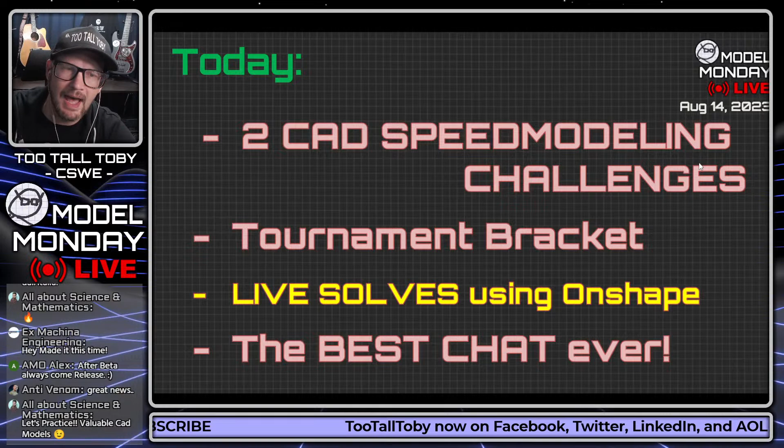So today we're going to do two speed modeling challenges. We're going to talk about the tournament bracket. We're going to do some live solves from this weekend using Onshape. And of course, we're going to interact with the best chat ever. Very excited to be in here with all of you.

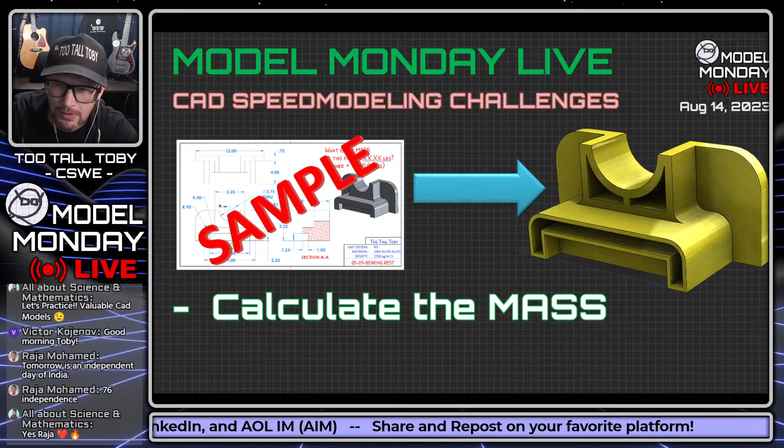And with that, let's get into our 3D CAD speed modeling challenges for today, Monday, August 14th. I'm going to show you guys a 2D print. You in the chat are going to be challenged to turn that into a 3D CAD model and calculate the mass. You can do this using any 3D CAD system, anything that you're using. If you're using FreeCAD, if you're using build123d, whatever you're using, it doesn't matter. All CAD are welcome here. So you're going to take this 2D print and turn it into a 3D model.

Raja Mohamed said, yes, actually, I only have one small laptop, so I don't have any choice. I was wondering if that's what was going on with that image. Yeah.

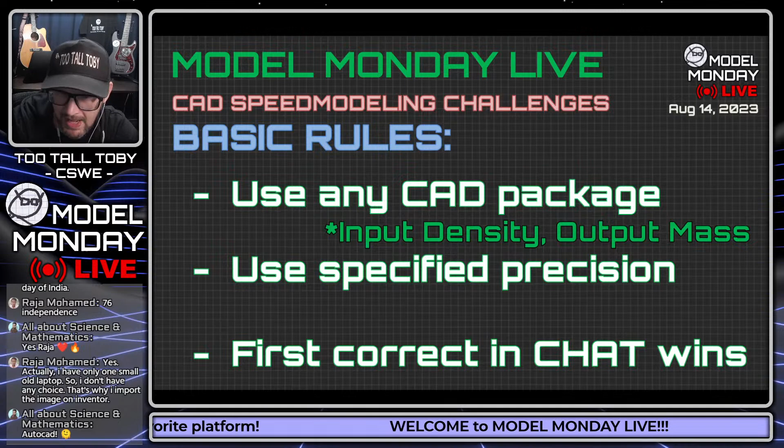And the advanced rules are this is meant to be fun and good-spirited. I will make mistakes from time to time, and the Ivan exploit is permitted. So if you find an opportunity to use it, feel free. But if you want to truly flex and do it the right way, that's even more impressive.

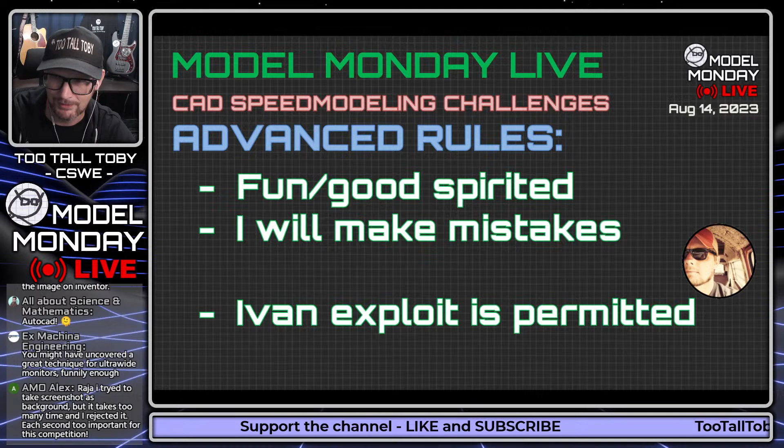All right, guys, here we go. Let's flip over to full screen. I'm going to show you this first challenge here. As soon as I show you the challenge, you're going to take a 2D screen capture and begin modeling this in your 3D CAD package of choice. So here we go, in 3, 2, 1, go.

So this is the cheap tool. I'm sure we've all received products that have cheap tools like this in them. I know I certainly have. And you kind of just throw it away and go get your actual toolkit, that way you can get the job done right.

But today, your job is to turn this cheap tool model, or drawing, into a 3D CAD model and to calculate the mass.

I'm going to take a sip of my tasty beverage today. Today I'm drinking unsweetened Pure Leaf black tea. So unsweetened tea is the drink of the day today.

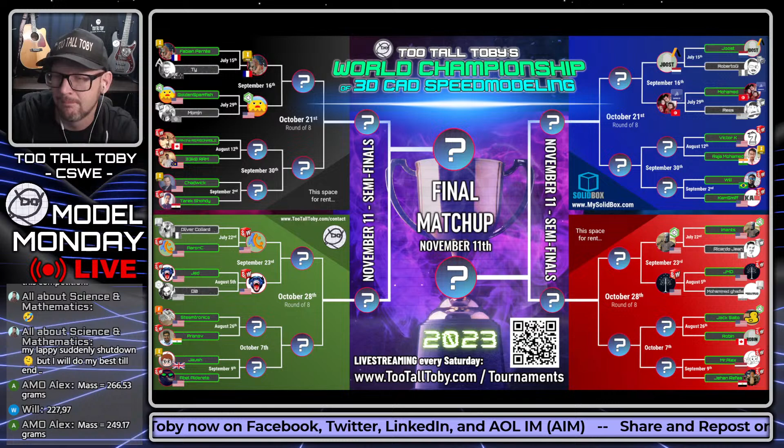Just hit me up at TooTallToby.com/contact, or AOL Instant Messenger, as you can see at the bottom of the screen. Still rocking the AIM for those of you who still have your old Windows XP computers, or your Windows 3.1 computers with your AOL IM installed, Windows 98 plus.

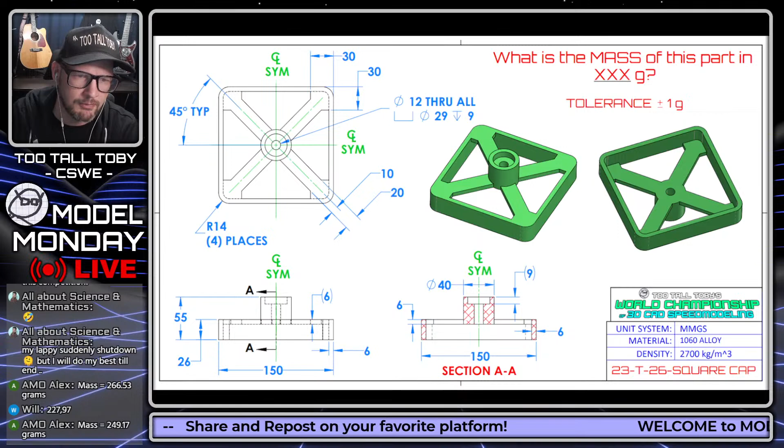Our third model here, Victor K and Raja Mohamed did this one, and they both were cruising through this model. It does have a little bit of tricky geometry with regards to the way that face is sticking out, so we'll take a look at how we could approach that.

And then this final model here, I think this one was pretty straightforward - a quick revolve, a couple of cuts, and some counter bores, and you're good to go on this last one. So let's start out with this first one here.

When it comes to a model like this, the main thing you always want to think about when turning a 2D print into a 3D model is your game plan for this challenge. What's my starting plane going to be? What's my starting profile going to be? I think in a model like this, you want to note that the model is symmetric, so we have symmetry here.

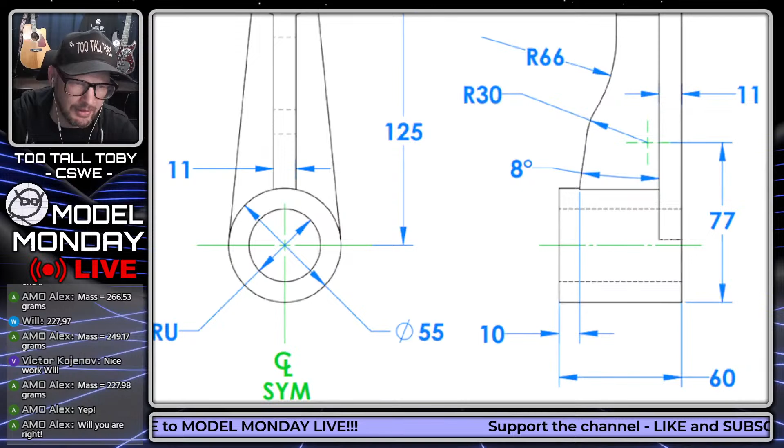We also have this 125 dimension coming from this circle here and going up to this upper circle. So it probably makes sense, it's probably just intuitive, to draw this thing from the top down and draw what we'd call the footprint of the model in 3D CAD.

So meaning you'd probably start out by drawing a shape like this. Now how much of that shape you want to include in that original sketch really depends on how comfortable you are with 3D CAD, with 3D sketching, and with contour selection and reusing those contours for subsequent features.

Because most of the time it's good to save your cut extrudes for later and create your solid geometry first. So what I would probably do is create this kind of footprint area here, this extrusion that goes up to 11 millimeters. Then I'd create this boss here that goes up to 60 millimeters.

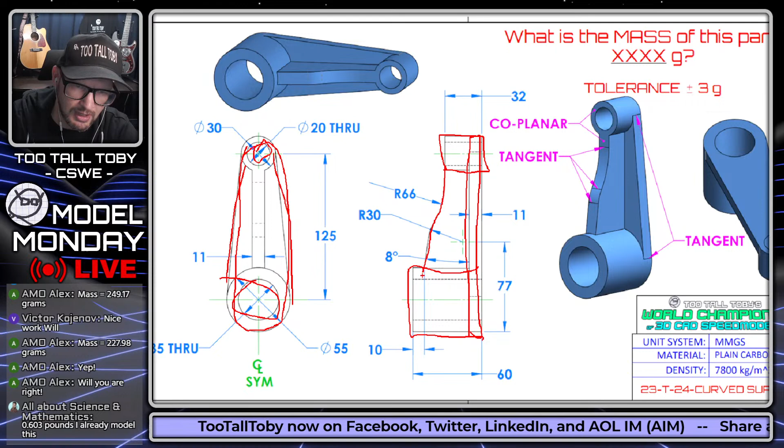I would create this boss here that goes up to 32 millimeters. I would create the rib, this kind of centered area, and then I would finish off by going back in and adding those cut extrudes.

So let's see what we can come up with this model. Just like what you guys are doing, I'm going to start out by grabbing a screen capture of this print. I'm going to move this screen capture over onto my second monitor, and then I'm going to attempt to create this model using Onshape.

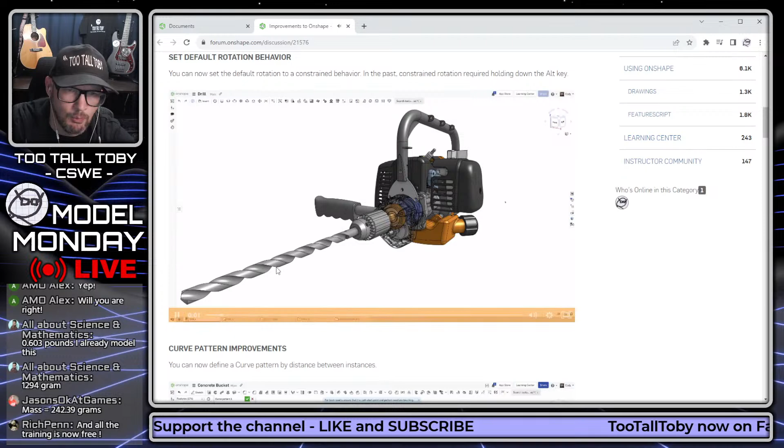They have videos that help you understand what those improvements are. So you can see here's a video with audio, using the right mouse button to rotate. Kind of just a quick little update here, giving us some new, different controls over how the rotate command is going to work when you're right mouse buttoning or middle mouse buttoning dragging in Onshape.

You can see there's an update here on how curve pattern works, and then a quick video, short, 14 seconds, 16 seconds here. It just really helps you to go through and see what has changed and how it has changed, and how you can start implementing that into your workflow right away. It's nice that these come out so frequently, and it's really nice that they explain right away what to expect.

Toby, I'm facing a problem with the cover model 6 days ago.

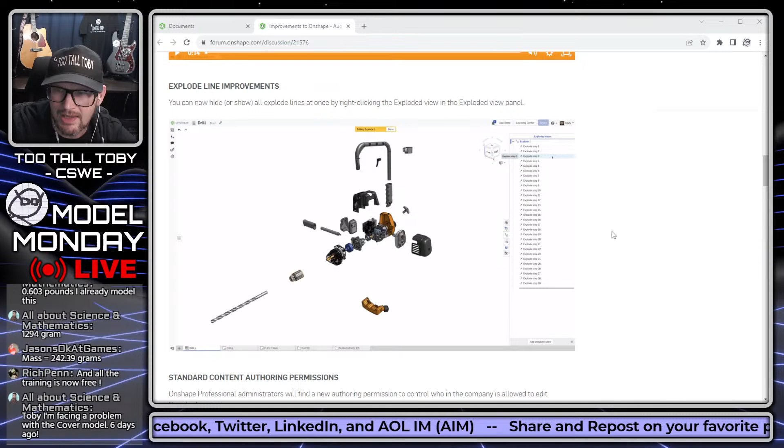All right, maybe we should take a look at that one today too. Let's see what happens with that one, all about science and mathematics. Let me see what I can do for you.

And all the training is now free. Yeah, the training in Onshape is incredible. It's up here at the top.

When you're logged in here in documents, you can go to what's called the Learning Center up at the top, and it's basically like college level degree courses, all laid out for you, start to finish - starting from somebody who has never heard of CAD before, explaining what CAD is, explaining the history of CAD, and then going all the way through into things that are really deep and specific to Onshape.

So the Learning Center has a ton of training in there that you can access for free. Again, if you're looking to learn CAD, or if you know somebody, a youngster in your family who's thinking about learning CAD and 3D printing, this could be a great way to turn them onto CAD for free and without having to install anything. It just works right in your browser.

So very happy with my Onshape experience so far.

Yeesh, next time, note to self, change units first instead of typing MM after everything. Yes, that is a good pro tip there, Jason. That is a very good pro tip. I've done that before too. It's kind of nice that Onshape will handle that in the beginning.

I actually made a video tutorial, I think like last week or the week before, about how I started out in inches or millimeters by accident, and I typed IN for the first sketch, and then I went up and changed the units after the first sketch. So yeah, it's nice that some of these different CAD packages can handle the different types of units that are out there.

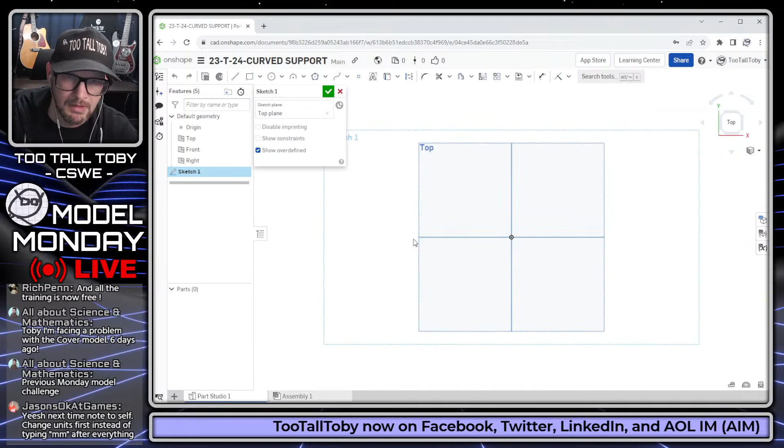I'm going to pick the top plane, press the S key, and begin the sketch command here on that top plane. Get normal, press the S key again, and now I'm going to jump into the line, arc, line workflow. So I'm just creating a line, creating an arc, creating another line.

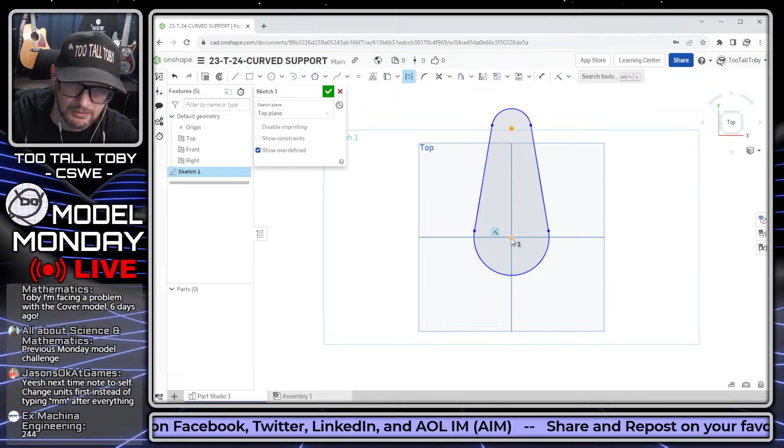Here I'm going to select these two entities and press T to make them tangent. I'm going to select these two entities and press I to make them coincident. And I'm going to select these two entities and press V to make them vertical. And now I'm ready to jump into the Smart Dimension command.

You can see here that even though this is running in a browser, it's just instant, snappy. That was one of the big things I was worried about when I was beginning to learn Onshape.

This should be 30 over 2. This should be 55 over 2. These are shown as diameters, but I am defining the radius. And then this is going to be the 125.

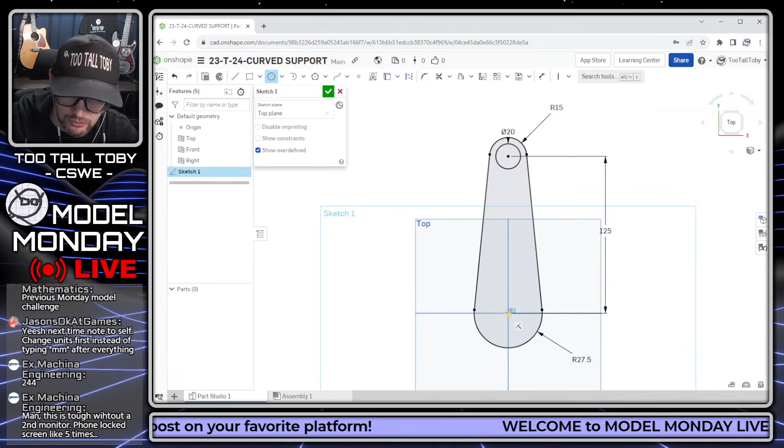One of the things I was concerned about starting to use a program that exists entirely in a browser was that the geometry was going to be slow or sluggish to create. And I've been pleasantly surprised that that is not the case. It just kind of instantly drops, instantly extrudes, instantly creates, and I haven't run into really any lagging. So super happy with that as well.

And there we go, there's my first sketch. I'm going to now take that and extrude it. I'm not going to extrude the whole thing. Instead, what I'm going to do is extrude this outer perimeter, but not these inside bosses yet. So I'm going to fill them in and bring that up to a height of 11.

And then I'm going to go back to that underside shape there. Select face, begin a sketch, and create another circle here. This time the circle is going to just go right up to this point here. S key, extrude, and that's going to go up to a height of 60. So that's 60 from the bottom.

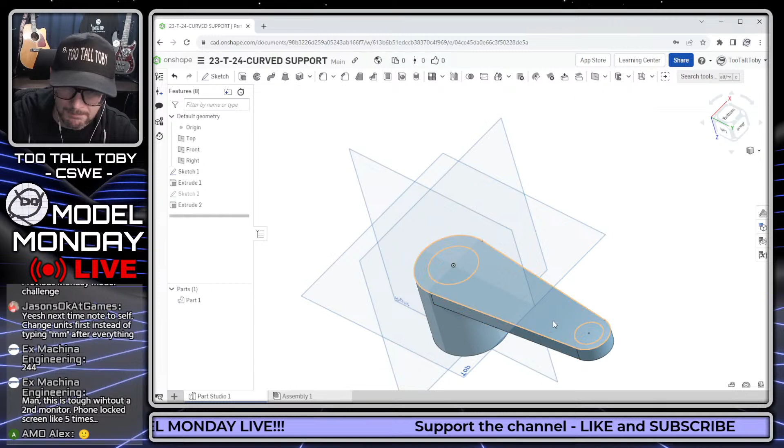Again, I'm going to go to this underside here, S key, begin a sketch, jump into my circle command, click on this other point here that I created in my initial sketch or layout sketch, and that is going to go up to a height of 32. A lot of times I like to use the tab key to get through there. I just tab through, get to the height, and then enter.

And now I can take this original geometry and turn that into a remove, which is like a cut extrude. And I can remove this geometry here. So let's reverse the direction and make that go through all to remove those holes.

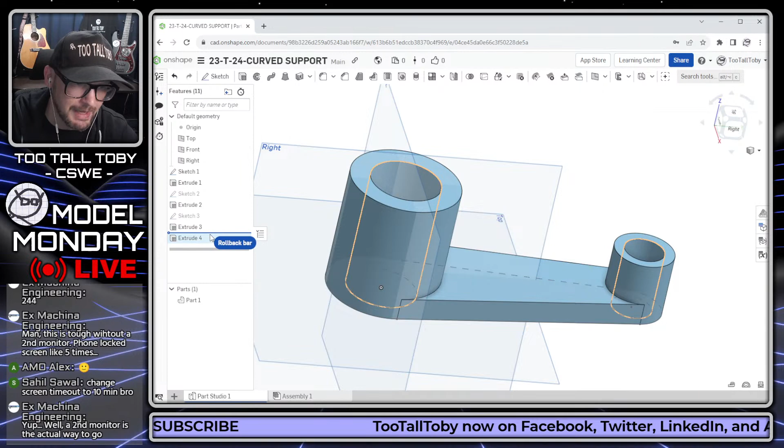And there we go, we got those holes, but whoops, I forgot to put the rib in. I wanted to put the rib in first. So we've got what's called a rollback bar here. We can roll that back to before those cut extrudes, and then I can add those cut extrudes in just a little bit later. So now I'm going to create the sketch for that rib.

And this rib is kind of tricky. It starts out coming down at an angle of 8 degrees. Then it goes into a radius here at 30 millimeters, and then it transitions in, oh sorry, it goes this way. Then it transitions into another radius here at 66 millimeters, and then it comes across with a tangent line, and then this line is going to be horizontal.

And this line here is supposed to hook onto this top edge of the model. So those two are supposed to be coincident or collinear. So there we go, that kind of gives me that location. Maybe I'll have this just kind of hanging out in space here.

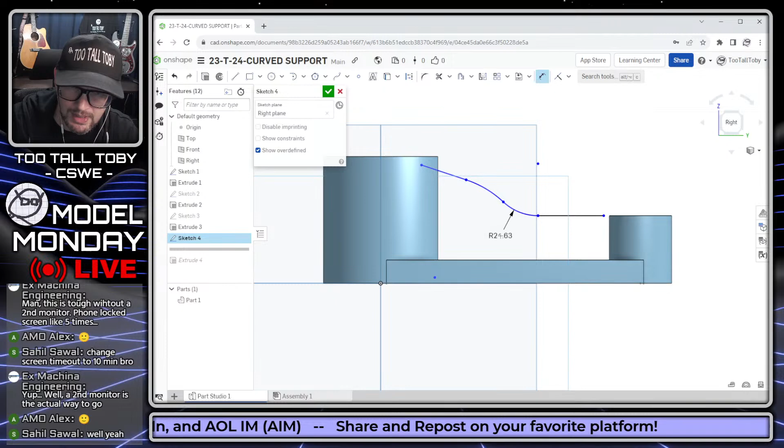And then we've got, like I said, a radius here at 66, a radius here at, this is at 30, and an angle here at 8 degrees. So yeah, I mean, you can see this sketch, I kind of did this on purpose. I wanted to make something that would be at least a little bit tricky.

I didn't want it to be too easy for these guys. I knew that these guys are experts, although I don't really know who's going to get what model, because that's up to the wheel of fate.

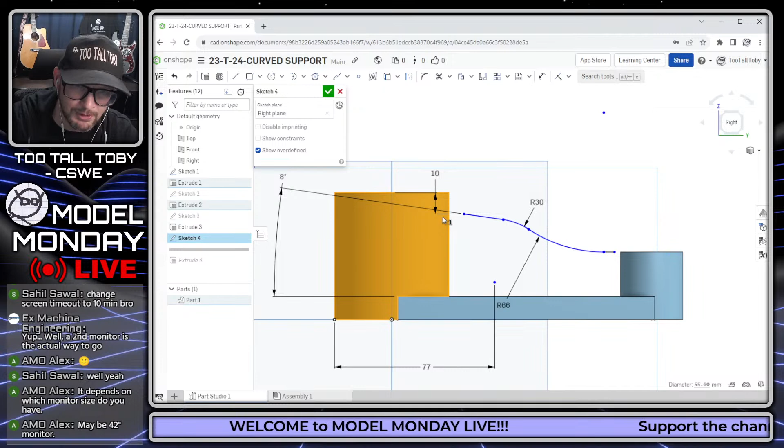You can see here that I was able to create that geometry, and then there's this one final dimension that defines the location of the center point of that arc, and another dimension that defines the location of this point relative to the top of the model. With that point being at this intersection, this is where things get a little tricky to figure out, how am I supposed to define that point?

In Onshape, sometimes if I'm having a hard time figuring out where the intersection is, I'll use what's called an intersection curve, just to give me something to reference. You can see I've got this intersection curve here, which is essentially a silhouette edge, and then I can just drop that point right on there. That pretty much fully defines that geometry.

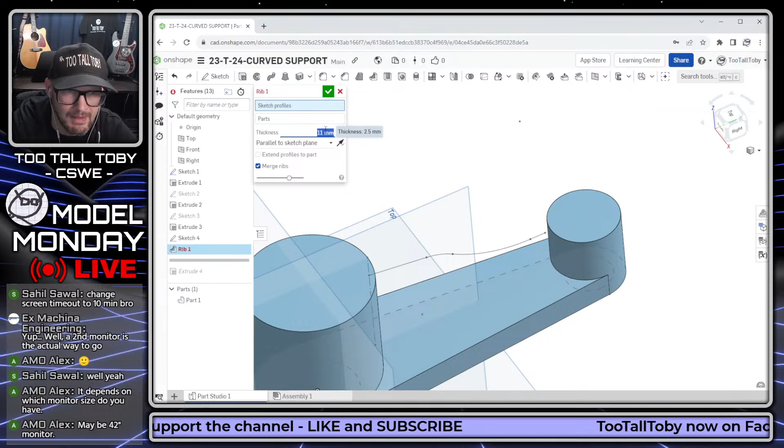Even though this line is still kind of out in space, I can now go into the rib command, finish out that sketch, and say that I want to create a rib that has a width of 11 millimeters, and that rib is going to utilize this sketch here. And then what you can see is that the sketch is kind of coming up short here.

This is where you would use this option, extend profile to part. Normally that would work, but it looks like I'm not really getting the feedback I was hoping for there. I've seen this happen. I think this is just a matter of Onshape needing to revise their rib solver a bit, to get it to the point where it automatically extends in those scenarios.

So let's hit the green check mark there. That finishes, at least it merged over here on this side, but over on this side I still have this gap. What can I do? Well, I could go back and edit that sketch and just extend the sketch over. The nice thing is I don't have the hole there, so that's gonna make it easier.

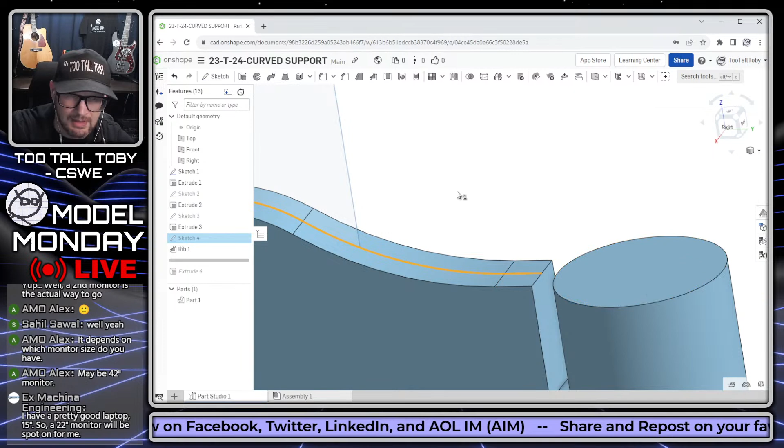I wonder though, if I do that, will the ribs still complete? Because now that sketch is overlapping. Okay, it does complete. So that's certainly one option. I'm gonna use Control Z here.

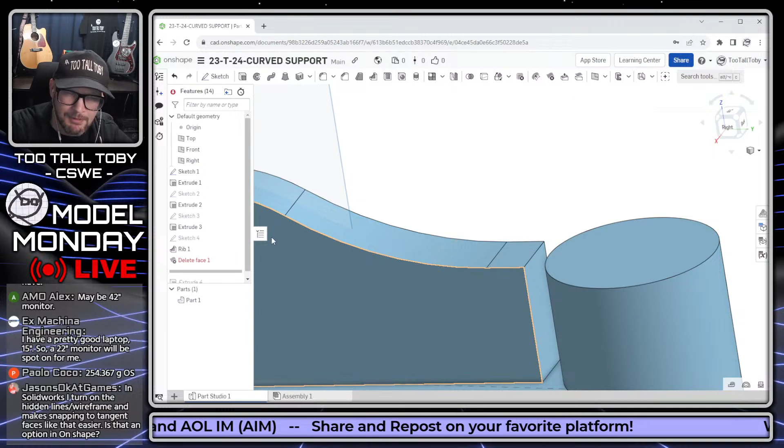Another option might be to use Delete Face. You know, we do love when people use Delete Face, it gets us very excited. So let's see if we do Delete Face here and heal, see what we end up with. Nope, that didn't work either. Is there another option here? Cap, leave open. Delete face didn't give me what I wanted either, unfortunately.

So maybe the final option here would be to pick this face and just do an extrude. One of the cool things about Onshape is that when we go to extrude, we don't need a sketch. So I can just pick that face and choose to extrude, and say I want that to extrude up to next, and it's just gonna run right up to that circular boss. So, a couple of different options there. It's always good to know there are different ways to do things and to experiment a bit with those when you run into challenges.

Rich Penn in the chat is saying you could use move face as well. Yep, move face would be a great suggestion there. I like that as well, definitely would work there too. Kind of just move face and push that thing over.

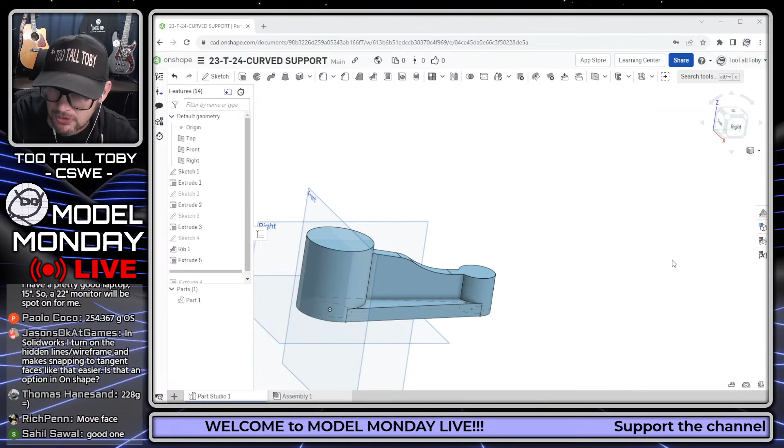Jason is saying, in SolidWorks, I turn on hidden lines / wireframe to make snapping to tangent faces like that easier. Is that an option in Onshape? Let's give it a try. That's a great suggestion, I don't know the answer. I'm basically an Onshape noob, I really am. I'm still learning, a little bit sharper than I was a few months ago, but definitely still learning a lot from the Onshape community. So let's try this again.

So we'll begin a new sketch here. Let's get normal to, and let's create this line coming down here. And can we pick... I can't seem to pick that edge still.

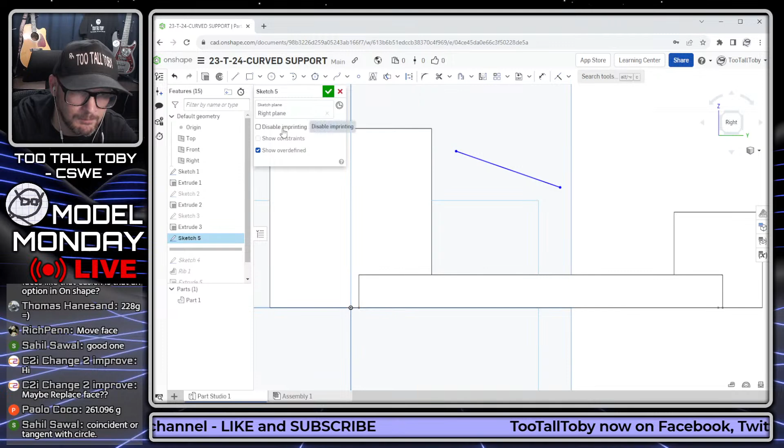I'm willing to bet there's some kind of shortcut that would let me do that, but I just don't know what it is. What if I disable the imprinting option now? There's got to be some kind of option for selecting the silhouette edge, but I haven't looked that deep into it. I've just kind of intuited my way through Onshape, and there's a lot I've found that way, but I confess this is one I haven't found yet. I'm going to keep my eyes peeled for that one.

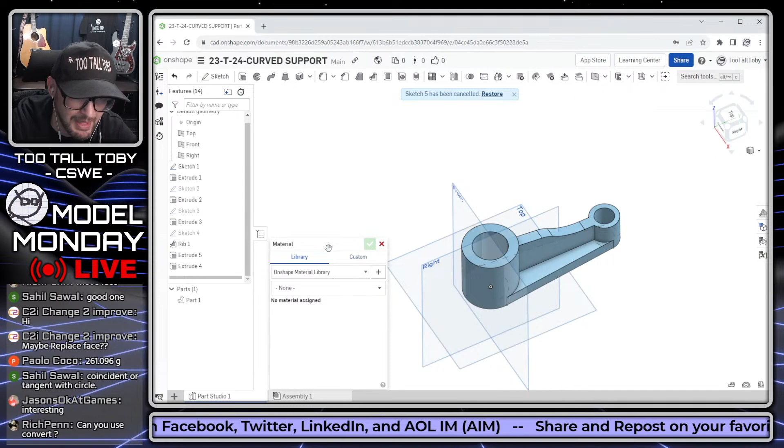But for now, let's take a look at this thing. We did the rollback bar, right? We rolled the bar forward so that now we've got the holes going through that thing. Let's right mouse button over here and say assign material. I don't use convert there, Rich. I used intersection curve, and with intersection curve I was able to grab that silhouette edge. But it would be nice if I could just grab it based on the projection from the sketch plane.

All right, this is going to be made out of plain carbon steel from my custom TooTallToby library. We'll go to mass properties of this thing and come up with a mass of 1294 grams. According to my answer key, 1294 grams is correct. So if I was in the tournament, I would enter that over here in the chat, 1294. Hopefully I don't enter the answer incorrectly and lose points for that. But that is the correct answer, and we did it.

Woohoo! Good game, Toby. Yes, indeed.

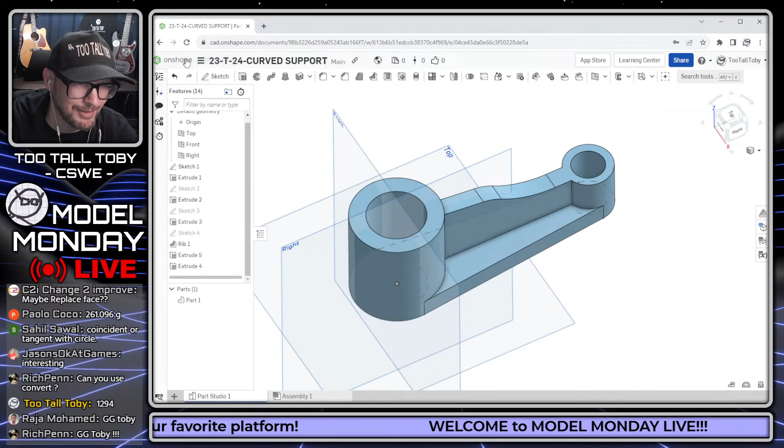I like it, man, I like it. This is awesome. Cool, cool, cool. One point to Toby.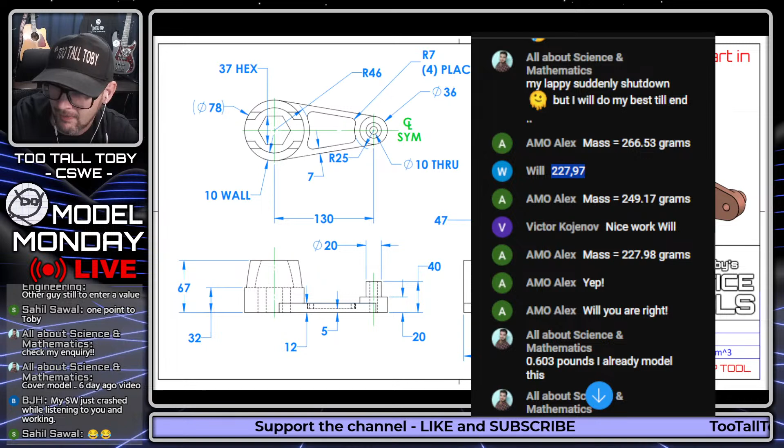We can see here that we've got 0.603 pounds, I already modeled this. It has changed, it is revision B. So if you're referring to an earlier version, you're not going to get the correct answer. Good try, but that is not going to be correct, that may be referring to the earlier version.

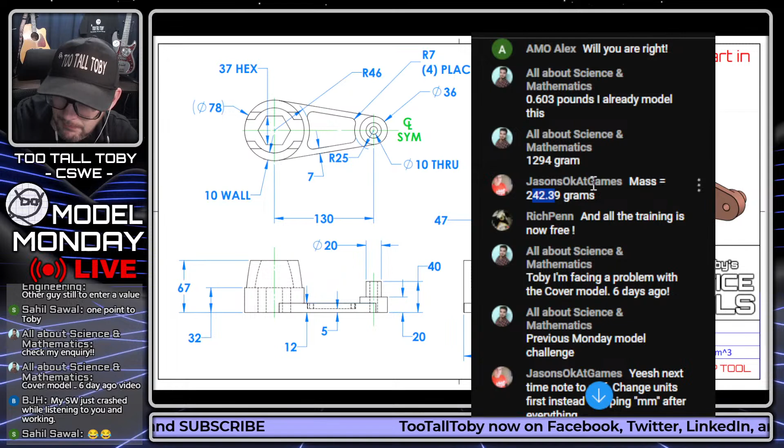Let's see here, Jason says 242 grams, nicely done Jason. Ex Machina Engineering says 244, nicely done, may have to do with the size of your monitor. Okay, yep, I'll leave that one alone. Paulo Coco says 254 grams, nicely done. Thomas is here, what's up Thomas, welcome, 228 grams. And Paulo Coco revising 261. You're allowed to revise as many times as you want in this Model Monday Live Challenge.

All right guys, I think that's everybody, I hope I didn't miss anybody. A lot of good answers coming in here. What is the correct answer? The correct answer is 228 grams plus or minus 1 gram.

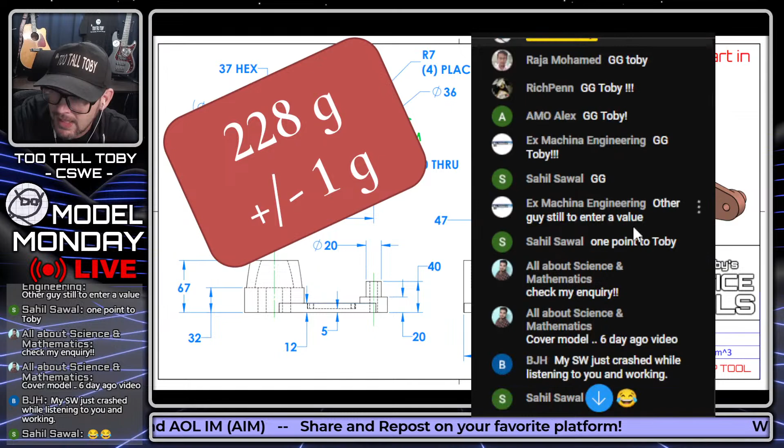So congratulations, I know I saw Paulo Coco, somebody in there revised at 228. I thought I saw somebody revise, 228 is the correct answer. Oh it's Thomas, Thomas came in there, 228, nicely done. The first person to answer that correctly was Will, 227.97 rounded up to 228, certainly within the specification.

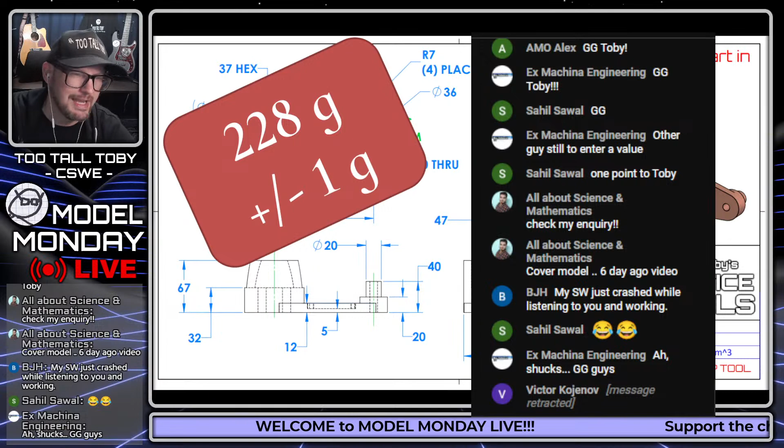Very nicely done to Alex as well, getting that correct, and very nicely done to everyone who submitted an answer here. If you went back to the old one, just note that a lot of times if there's a B at the end of the drawing name, that's indicating it is a revision from the original. Some of these I go back to the original and come up with a new one, trying to give you guys a little more variety, a little more practice. So GG to everyone, and especially GG to Will, earning the point today. Very nicely done, and congratulations.

Well done, well done. Let's take a look at another challenge here. Will, you are the winner. Yes indeed, here we go. Your second challenge comes at you...

On top chat mode, oh thank you, thank you Victor, I swear I changed that before. Okay, if I missed anybody let me just go through and look real quick. I don't know if it's going to refresh and show anything I missed. Oh yeah, Victor, you're in here now. Okay, stand by guys, we got a quick revision here. Here we go, quick revision here. I was on live chat, or I was on top chat, not live chat, I always forget to change that.

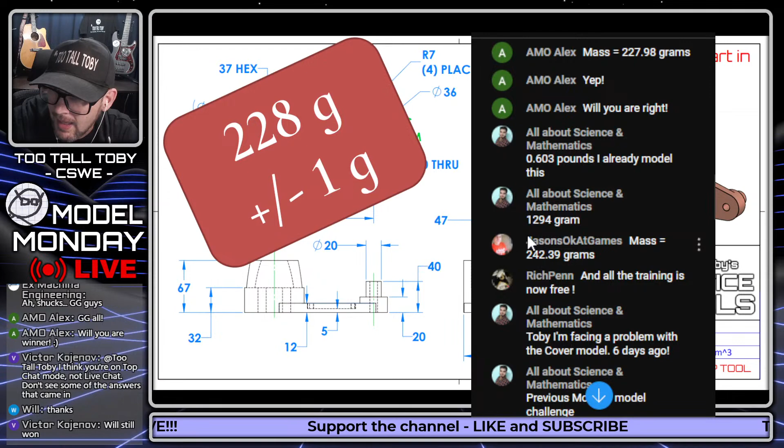So you can see here, Will, 228. Victor coming in right after AMO Alex, 228, very nicely done Victor, missed that one before. I think there may be one or two more in here that I missed before, I'll definitely be on the lookout for those. Doesn't change the result, Will still gets the point, but good to know, and thank you for that. Missed a couple chats there. Thank you, yep, Will still won.

That could be a good t-shirt. Will still won.

All right guys, let's take a look at the next challenge here. This next challenge comes at you live in 3, 2, 1, go! What is the mass of this part in XXX grams? This one is called 21-04-01B, B, it is a revision, Shoulder hinge. Take a look guys, what's the mass of this part? This is in 1060 alloy.

We'll see what's what with this one. I like this song, that's why I'm being quiet.

All right guys, take a screen capture of this, try to turn it into a 3D print, do your best. This is Model Monday Live, so we are attempting to take this screen capture, turn it into a 3D model, calculate the mass. What is the mass of this part in XXX grams? And of course, enter that mass in the chat.

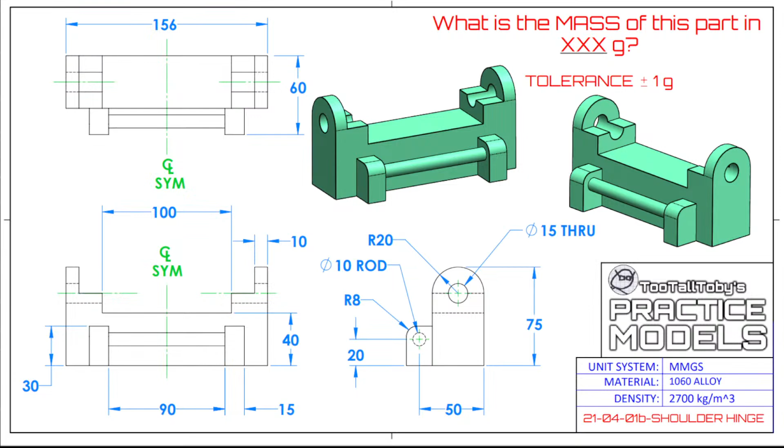All right guys, hope that was enough time for you to grab that image and begin turning it into a 3D CAD. 3D something, I don't know.

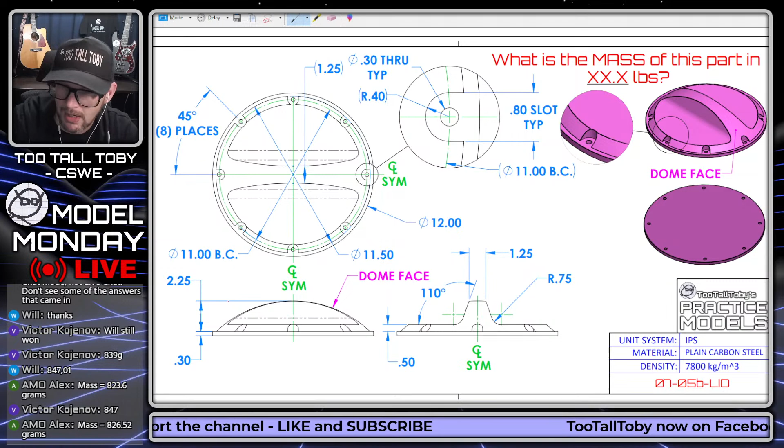Said I have trouble with the cover model. Oh wait, this one, the lid, or a different one? The cover. Oh no, the cover, not this one. Sorry guys, give me a second here. Open the wrong file. Cover, yeah.

Just give me one second here, please, getting the other file up. I'm really taking my time to not show you the version of the document that has the answer shown, and then I'm realizing that I have the answer shown right at the end of the video. The answer is public knowledge. I don't know why I'm taking so much time to obfuscate the answer, but anyhow, I already did, so that's it.

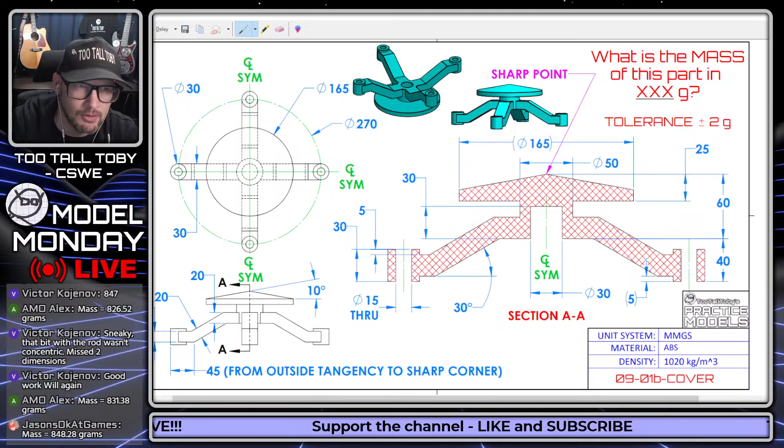So here we go, cover, 901B, cover. Good suggestion here from All About Science and Mathematics. Great model here, a little bit tricky. Let's see if we can knock this thing out in Onshape in the next 5 or 6 minutes, and then I will show you guys the answer to the challenge you're doing. So if you want to take a screen capture of this, this will at least let you get close to it.

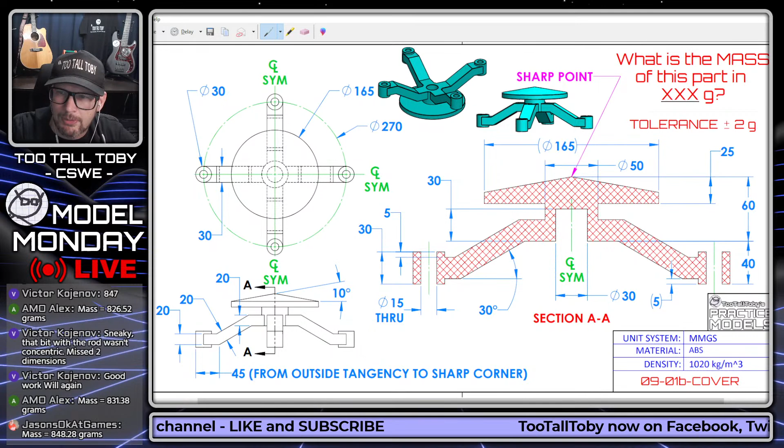And with this model, as always, we want to come up with a game plan. The way you come up with a game plan when you're trying to turn 2D prints into 3D models, or really trying to turn anything into a 3D model, is you want to unbuild the model in your brain. You want to think to yourself, what are the different elements of this model?

So we've got this leg here, that's one element. We've got the circular boss at the bottom of the leg, and there's a pattern of those, a 4X pattern. So we know that we're going to use a circular pattern. We're only going to make one of those legs, and then we're going to pattern it. So that's one section of the design.

And then there's this kind of center area that comes over, comes up, and then comes up to a point here. And that's probably going to be created as a revolve. So we'll have a center line, and then we'll revolve about that center line to create that centered area. Well, that's another area of the model.

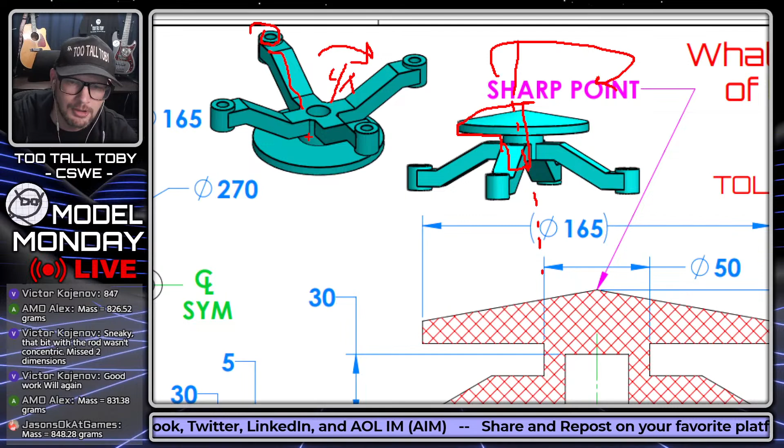And I think I'd probably make that area first, and then I would go and make one of the legs and try to pattern that leg around the model. So now I kind of have an idea of the game plan for creating this geometry.

And this is just a habit that you want to get into. You want to really get yourself into the habit of thinking, how am I going to build this thing? What's my game plan? What features am I going to use? You want to think about all these things before you actually jump in and start sketching. And that's going to really set you up for success.

Again, whether you're doing speed modeling like what we're doing here, but certainly in the real world, this is just what you do. If you have an idea for something around the house, you're going to visualize it in your head. Maybe you're even going to sketch it out. And then you're going to ask yourself, what features am I going to use to build this thing? What's going to be the order of feature creation? Where's my starting sketch going to be? Where is my origin going to be? So these are all really good questions to ask.

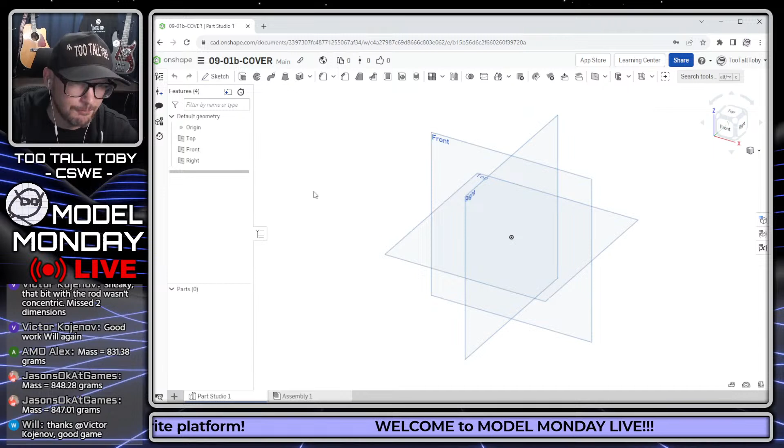And I think that for this model here, I'm going to start with a sketch on the front plane. And that sketch is going to have this point here at the top. And the first feature that I'm going to create is going to look something like this. So I'm just visualizing this model. I'm looking at the section view of this model. I'm really looking at this area up top here.

This first feature looks kind of like a pointed nozzle type thing with a circular boss at the bottom. So now I can use this geometry from the section view, the dimensions from the section view, to define what that geometry is supposed to look like.

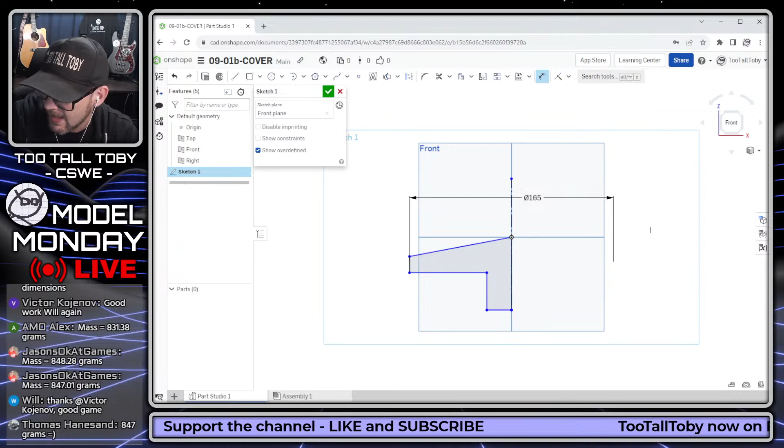Here you can see what I'm going to do is use the Q key, and I'm going to create a center line. And that way, when I go in to add my dimensions, I can create doubled dimensions across that center line. Makes it way easier than trying to type in half the dimension or calculate that on the fly, or whatever else you might have to do to get that half dimension for the radius.

So I'm just looking at the different views here, looking at the dimensions from these different views. By putting that origin right there at the top of that peak, it really helped me out to get this geometry fully constrained, or fully defined, meaning that it's changing from blue to black. So looks like this is 50 to that center line, 50. And there we go, that's our first feature.

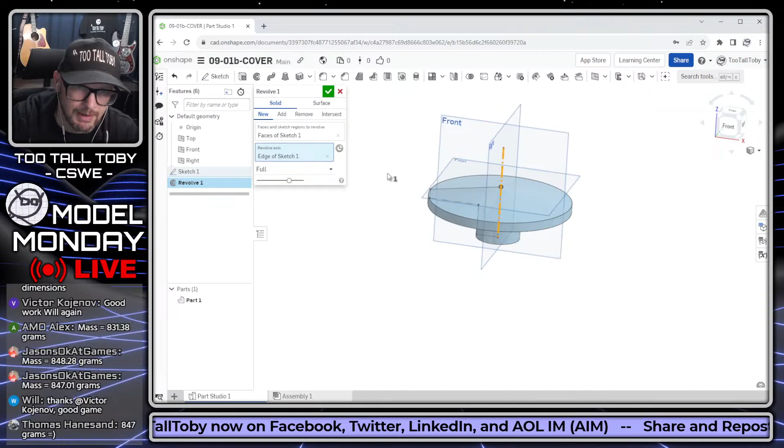Let's take that geometry, turn it into a revolve. Here we can see in Onshape, we're going to just pick our axis for revolution, and boom, Onshape gives us a really nice preview. That's pretty much what I was expecting that first feature to look like, so that's good. We're done with that first feature.

Just like last time, I could have put this cut extrude in the bottom of the model, but I decided to wait, and the reason I'm deciding to wait is because I anticipate that the sketch for the leg is going to start out there right at the center and then come over and down, and I'm going to create the sketch for that leg.

So, I don't want to give myself extra challenging geometry if I don't need to. Let's just save that cut for the end, and we'll hog that thing out at the end. So now we need to determine what the geometry of that leg is supposed to look like. And this is where things get a little tricky because of how the dimensions are in this model.

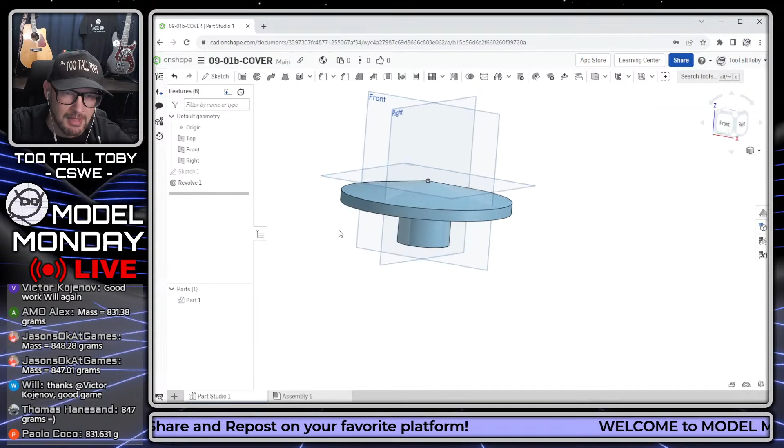This is one of these spots where a lot of times I see Onshape users in the tournament kind of merging the technique of a layout sketch and the sketch for their feature. What I mean is, a lot of times I've seen runners create the geometry of the leg like this.

So let's just say this is the geometry of the leg. I'll go back in and clean this up in just a little bit. But they'll create the leg like this, and then also create the geometry for the foot itself as part of that same sketch. Maybe create some geometry like this, and even a center line here going from midpoint to midpoint. Let's press Q to change that to a center line there, going midpoint to midpoint.

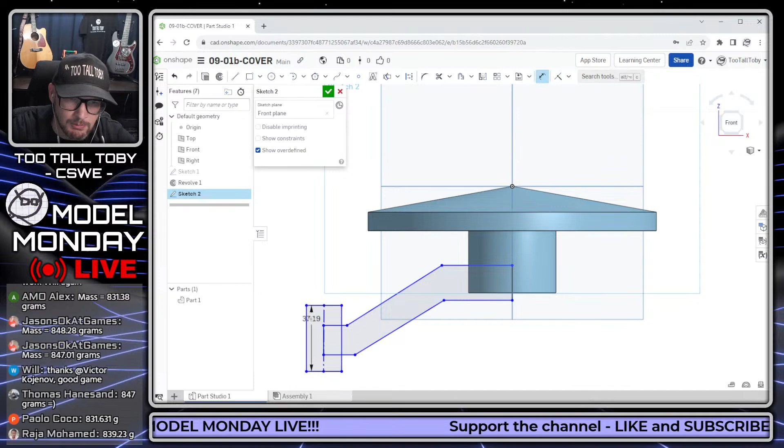The reason they do that is just because it makes it a little bit easier to get in here and start laying out this geometry and making sure we've got the correct sizes. So I could totally get on board with this technique. I think there's a lot to be said for it. It's something I can always go back and reuse that sketch at the end, so why not just include it here?

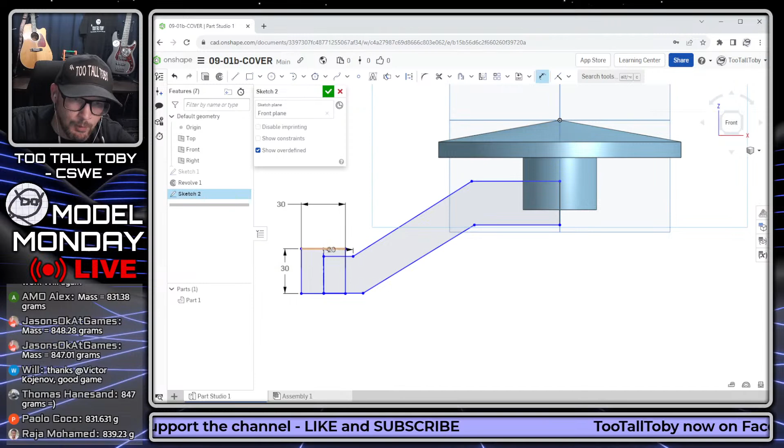So now it's just a matter of going through and starting to define some of these dimensions, define the stuff you have already, and then maybe come back and define the stuff or try to figure out why things are still blue. That's a good technique. Once you have a few dimensions, you can get in here and start changing some of the sizes of these elements. So it looks like the height here is supposed to be 20.

I guess I can just take this leg and drop it right onto that same center line, right? The leg here and the center line can be coincident to one another. And then that's going to be vertical. I think that will probably work. I don't know, if that gets me into trouble later, I'll take a look at it.

Let's see here. The distance from this location, the tangency point of that circular boss, to this location, the corner point of the leg, is 45. That's a weird dimension. I don't know who created this model, but...

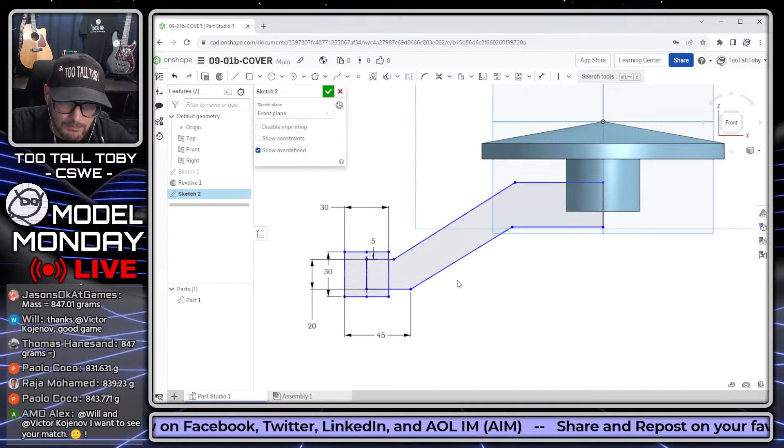Okay, make those two lines there parallel. These two are also 20 in thickness. And I think this area up top here is also 20 in thickness. Yep, this is 20 as well. There we go. And then this and this are going to be collinear or coincident. All right, this thing's starting to get a little bit closer to what I was hoping it would look like.

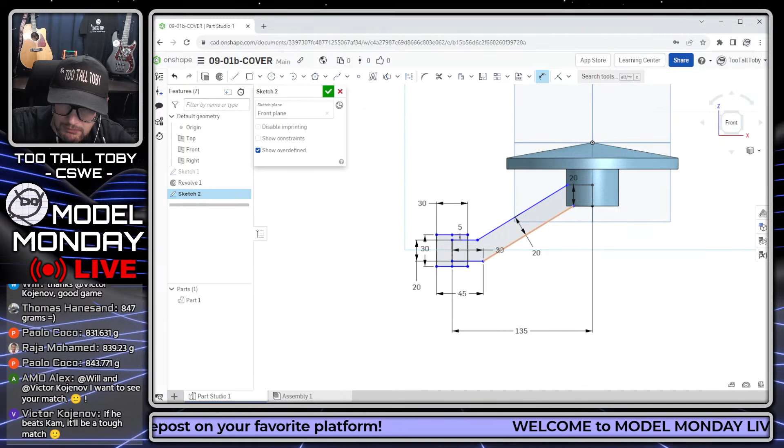We've got a diameter of 270 from the center of that circular boss all the way across, so let's type in 270 divided by 2. Okay, and that gives us half of that diameter. We've got an angle dimension here. So as we go through and keep adding dimensions, we get more and more black lines, and that's really what we want, that's what we're hoping for.

It looks like there's a distance from the bottom here to the very bottom of this circular revolve. Having that circular revolve in there really helps to fully define this thing. And there we go, 40 and fully defined. So that's an example of creating the geometry for the leg, but also creating the geometry for the circular boss kind of in one step.

And so now we can jump into our extrude command and say we want to extrude not this whole thing, but this region and this region. Those are going to get extruded out to a depth of 30. Let's make that mid-plane, or symmetric as it's called in Onshape. We bring that out to 30.

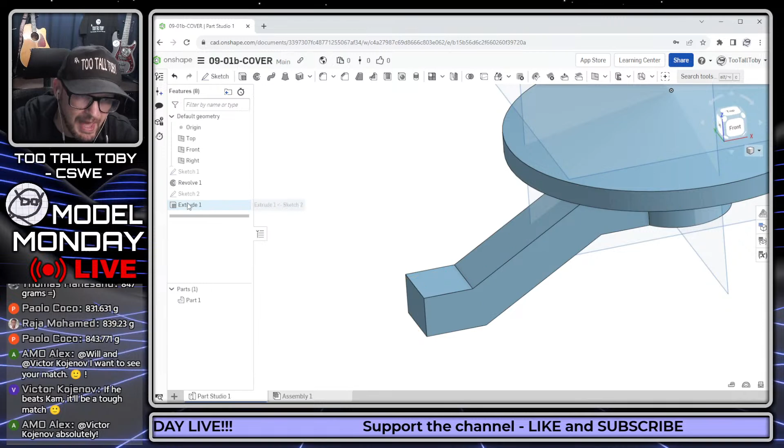Now we can go back and show that sketch again, and now we can use that sketch to create a revolve. So we're going to say that we're going to revolve just this region. I wonder if that revolve axis needs to be solid. Let's see.

Yeah, I think it does. Okay, no problem. So now I could either make that solid there, or I could just create a new sketch, which is probably what I would do in this spot. I would just make a new sketch.

Just take this point and this point, drop in a rectangle, and then say I want to revolve that about this line here. And there we go. That gives us that circular boss.

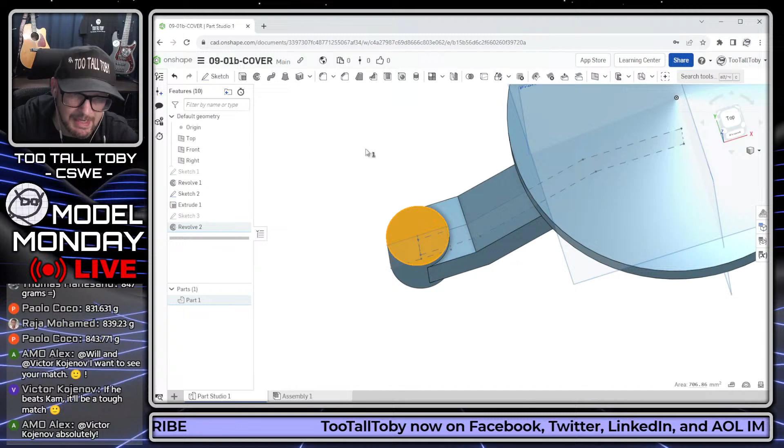And now we're ready to drop a hole in there. We can either use the hole creation tool, or we could just make a cut extrude. I think either one is valid. I'll do this with a cut extrude for this time.

So now this is going to have a diameter of, looking at my print here, 15. Wow, that was located in a weird spot. It was on the section view. That could either go up to next or through all.

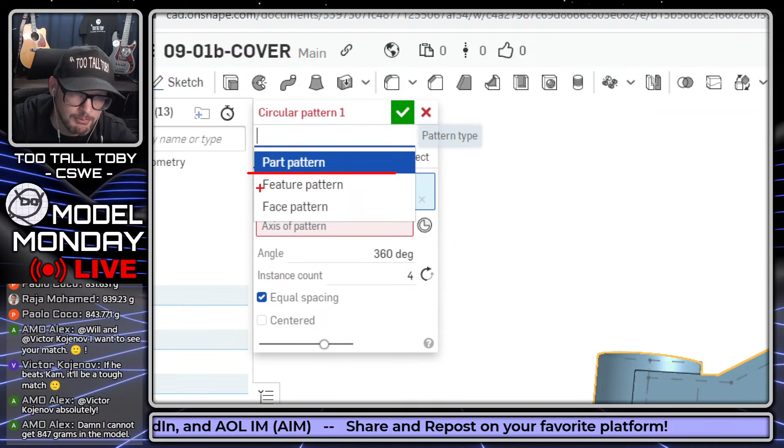There we go. And now we're going to do a circular pattern. So here in our patterns, we're going to do a circular pattern, and that is going to be of the leg of the boss here. Oops. Oh, okay, sorry. In Onshape, you've got this option here. Whenever you do a mirror or a pattern, you have to remember to go into this pull-down menu and specify what it is that you're trying to pattern.

So I'm just going to try and pattern this feature. Honestly, in this particular example, I probably could have just done the whole part and patterned it because it's currently axisymmetric. But then for my axis for pattern, I could maybe pick this line here or whatever. There we go. 1, 2, 3, 4. That looks pretty good. Let's hit the green check mark.

Oh, what happened there? Let's see here. 1, 2, 3, 4. That all looks good. And maybe I would be better off just doing the whole thing. Let's try it with a part pattern.

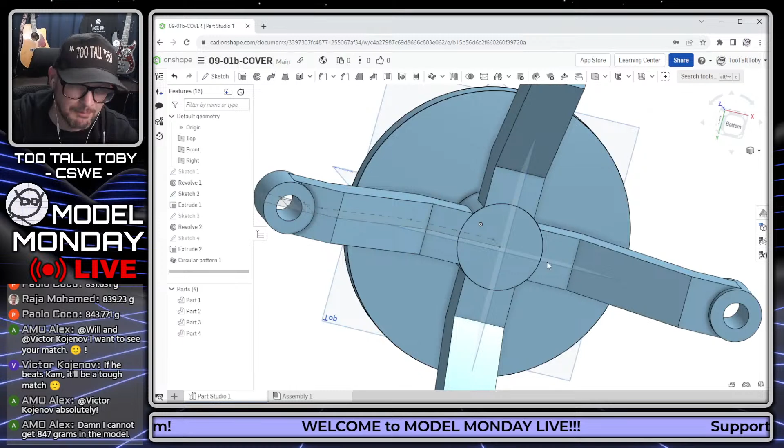Boom. I didn't think I was going to need to use that, but I'm glad that it worked. Let's do that. Really, we want that to be merged. I think I missed a step here to merge those, but it's easy enough to get in and merge them.

And then we will hit the S key, create a circle here, and we're going to create a circle on this bottom surface with a diameter of 30, and that is going to get extrude cut to a depth of 30. Nice and easy. And now we can go to our material here.

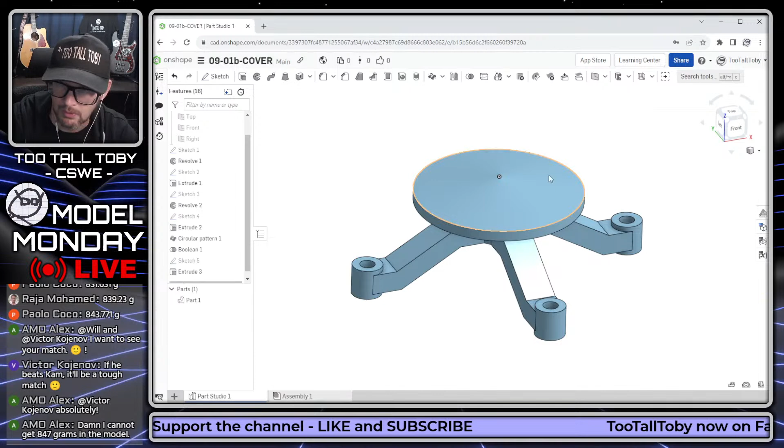So we can hide some of this stuff if we don't want to see it. If anything's shown here that we don't want to see, we can press P to hide our planes. We can go to our material here, and the material is going to be ABS. There we go. And then finally, we can go to our mass properties, and we can see that this thing has a mass of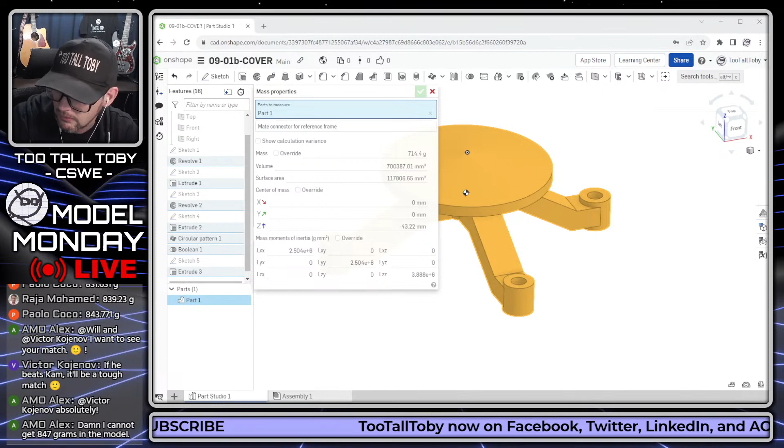714.4. Is that right? And I don't know if that's right or not.

Here's my cover drawing. Like I said, guys, I was obfuscating this for no reason. Now you guys are going to get a chance to see it, and we'll see if we got that right.

714. Boom. We did it. So that is correct, 714, and I hope that that helps you.

It's all about math and science and mathematics. I hope that that was good.

I see that some people are having to kick out of here, and I understand. I actually am teaching later today, so I'm gonna have to kick out of here soon as well.

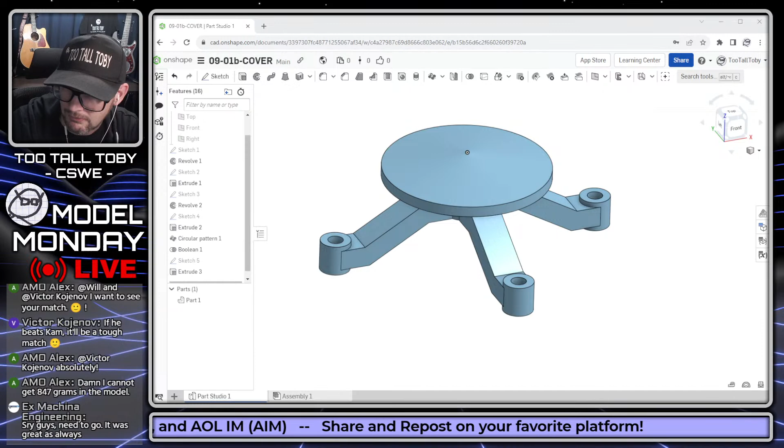Good. Oh, I don't know if you're saying sorry because you have to leave, or if you're saying sorry because we showed that, but that's all good, man. I'm glad that we showed it. That was good stuff. So there we go.

That is how you would do that model. I hope that that helps with how to create that model. That is the correct answer.

So let me close that document. And then if you guys ever want to find these documents, just go into Onshape and you can search the public space and you can take a look at those documents. And let's take a look here at our answer. Remember, guys, if you ever want more practice, I have over 50 models on the practice models playlist.

All right, here we go. Answer number 2. Let's see what kind of answers we got from the chat on this one. I saw some answers coming in right away on this one. So let's see what we got on this one. We got 839 coming in from Victor K.

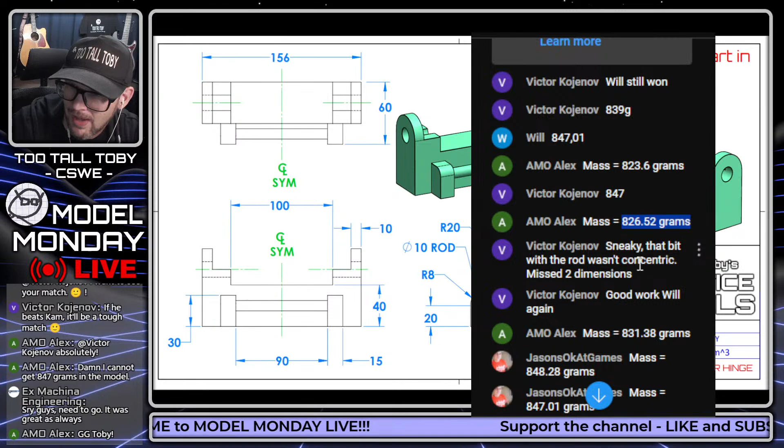Will coming in at 847, AMO Alex at 823. So the very first three answers are all different - that's good to see. Victor revising to 847. AMO Alex revising here to 826, then revising to 831. JasonsOkAtGames coming in 848, revising to 847. You can revise as many times as you want. Thomas coming in here 847. Paolo Coco coming in 831. Raja Mohamed 839, very nice. Paolo Coco revising to 843, very nice.

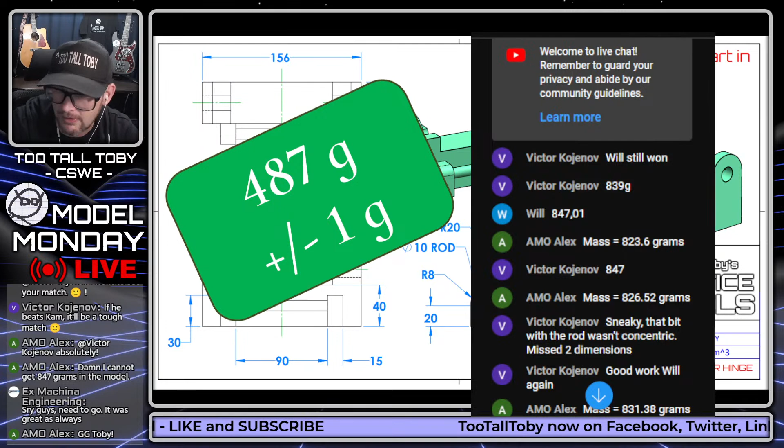Let's see what the correct answer is. The correct answer for this one is... 487. Wait, that can't be right if you guys are all coming in with 847. I think I just transposed one of those numbers there. 847 is the correct answer. Nicely done to the chat. Let me just change that real quick - little minor glitch in my brain. 487, 847, there we go.

Boom. So congratulations and GG to Will coming up with the correct answer first. Congratulations to Victor K coming in right behind him. These guys might be on a collision course in the tournament, so we might end up seeing the Will versus Victor K showdown here in a little bit.

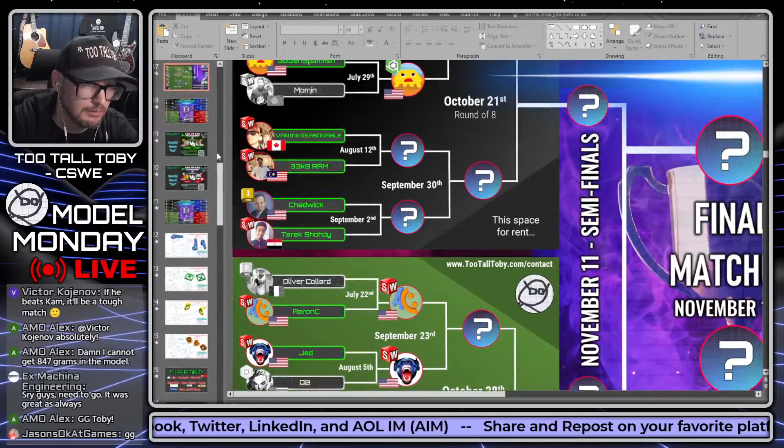Is that possible? Let me see. Hold on, let's look at that tournament bracket. Do I have the tournament bracket at the end? No. Let's look here. Will and Victor K. Oh, man. If Will gets through his match with Kam, then it's going to be Will versus... Wow, then it's going to be Will versus Victor. Let's go there to the blue bracket. There it is.

So good luck, you guys. You got a little grudge match going, I like it, I like it. Will gets both points for today. Guys, let's give Will a GG in the chat. Let's look forward to that matchup. Victor K did advance through this weekend, so if Will gets through on September 2nd, it's going to be really, really interesting.

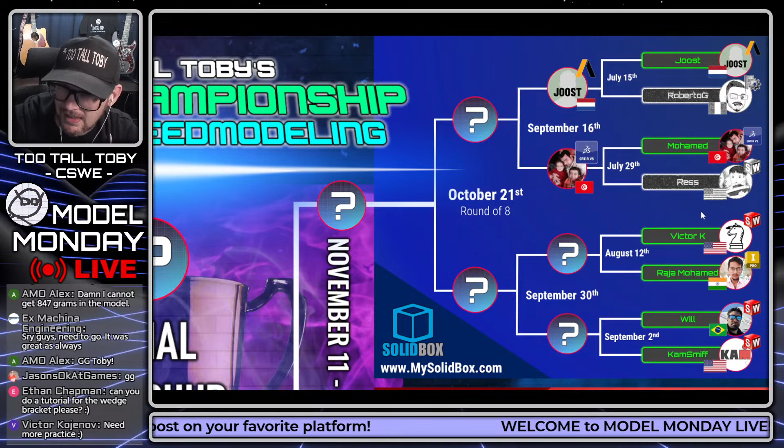Ethan asking in the chat, can we do a wedge bracket, please? Yes, we can definitely do a tutorial on that one. No problem, Ethan, we'll get that one out there as soon as possible. I'll try to release several of these tutorials for the next couple of weeks because I'm going to be out of pocket for a few days.

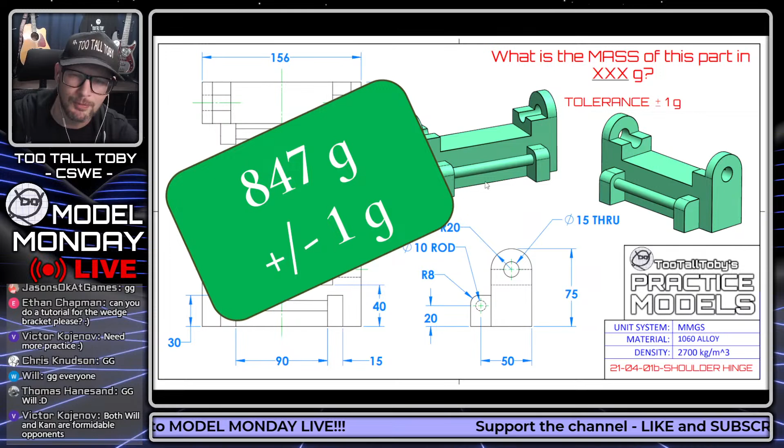But thank you guys so much for joining me today. This was a lot of fun today. I'm glad we got to do our challenges, glad we got to answer some questions, got to go through and do a tutorial there on the cover using Onshape. Glad that Will was able to get the answers right on both - Will gets 2 points, gets a clean sweep, gets a bonus point for doing the clean sweep. So congratulations, Will, 3 points for Will today. And congratulations to all of our winners and really everybody who did chat today.